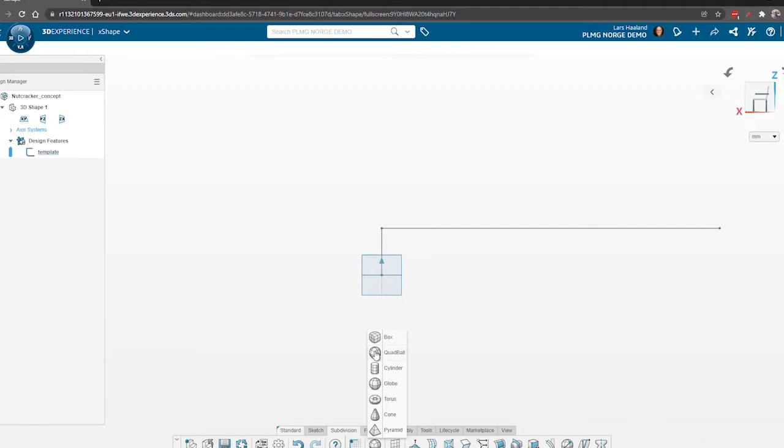So Lars, maybe you will tell us a little bit about the design process to start with. I can indeed. It's a regular tongue style nutcracker. And I had some fun doing this in the 3D Experience xShape app, which lets you basically stylize the shape from a primitive, and you can work from that all the way into a finished manufacturable model, actually. In this case, I used SOLIDWORKS to add the hinge part, but I could have stayed all the time with the model in 3D Experience.

Actually, I had some fun also using this 3D Experience platform to make this pattern, which lets you explore different pattern types quite easily. That's these teeth going in the center there. Exactly. Quite cool. And then we had some iterations back and forth to find out what was actually going to be printable of that pattern. So we landed on something that would hopefully do the trick with the nuts.

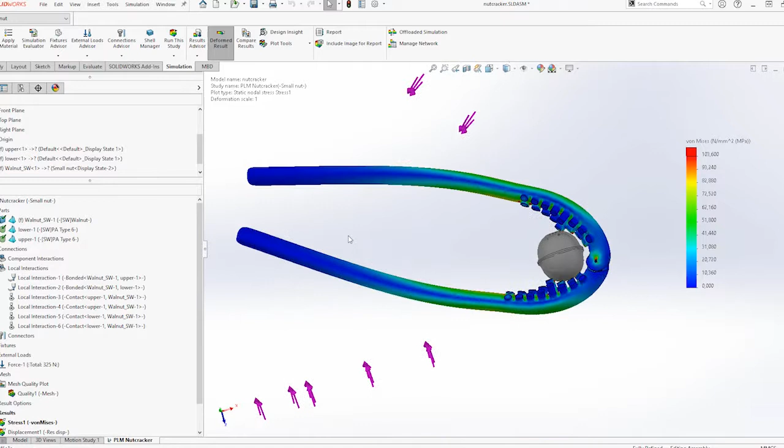Yeah. And due to the plan that it was FDM technology that was going to be used, we are a little locked down by the nozzle size. So there's a lower limit of what we can print. So you need to compromise, but I think it came out quite good. Design-wise, but simulation-wise, those teeth didn't do very well. It looks really good, Lars, but that is the weakest point. It will be exciting to see how they will handle when we start cracking these nuts.

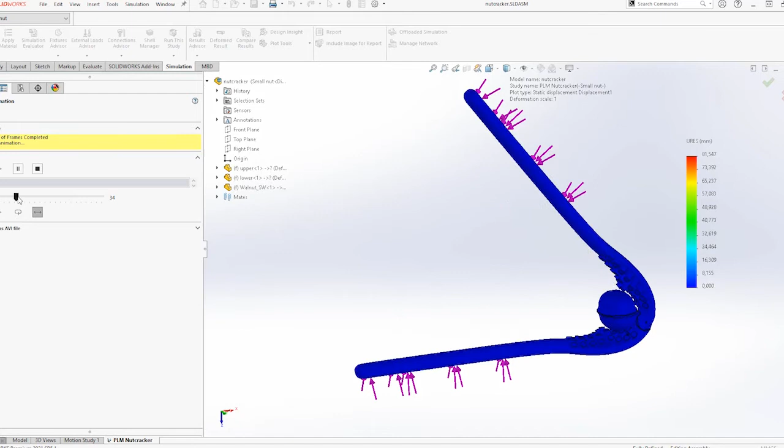Yeah, because we saw that there were some issues around some high stresses where these teeth came over into the handle. So both around all of the teeth, even where you had the handle bending too much, you ended up having stresses on the teeth. You did something to reinforce that, Stian, didn't you? Yeah, what I did was that

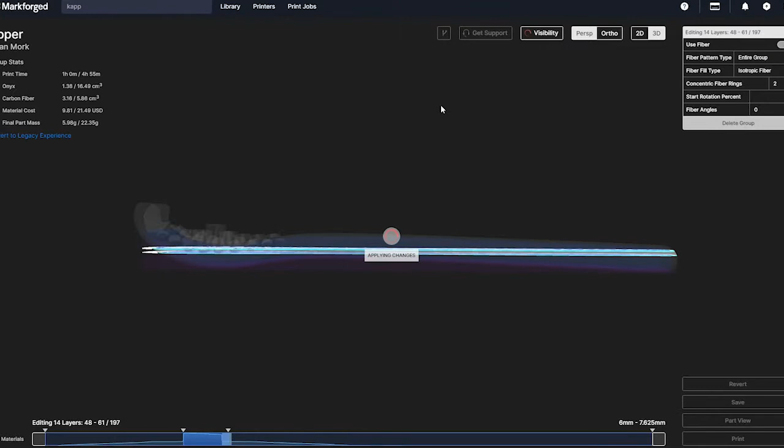I used a Markforged printer to print these parts, and Markforged are able to put reinforced fiber into the components. And if we put the fiber in the direction where the forces will go, we can actually come up to aluminum strength of the parts, which is quite nice for a plastic part. So due to the handles, I'm never afraid that this will not be able to withstand, because these are really rigid and they can take a lot of load.

But as you said, regarding the teeth, these areas are a little too small to be able to put fiber inside. And I tested this nutcracker a couple of times now, and you can actually see in the center that these teeth that had problems in the simulation have actually broken. So that shows that your simulations are correct, Erin, and you predicted this with SOLIDWORKS simulations. That's really good.

So you want to see the nutcracker in action? Yay! Please show us. So I will try to show it now. Put the nut inside it, and yeah, you see? All right. And the nutcracker is still alive and working. So that's really good. And the nuts are delicious.

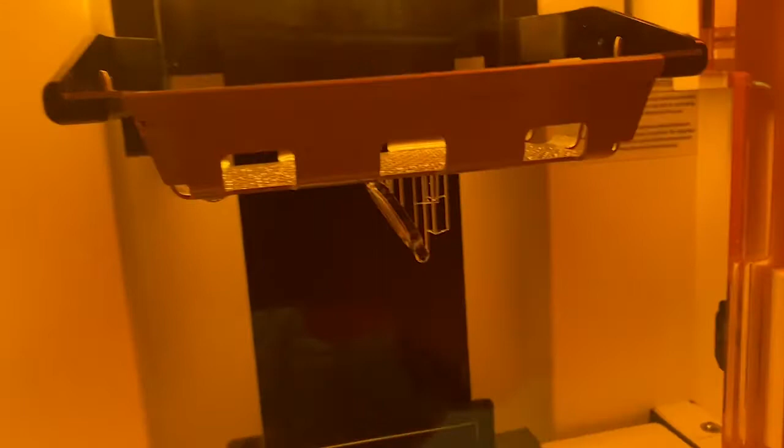I printed the main part on the Markforged with the carbon fiber inside it, but I also wanted to print a PLM Group logo, to show that we had designed and made this ourselves. So I used the Figure 4 DLP machine that we have from 3D Systems, which uses resin, a floating material, and a projector with UV light. When the UV light hits the resin, it will solidify, and you can get quite detailed parts out of it. This is an eggshell material used for eggshell molding, which has this cool transparent yellow color, and you can hopefully see the PLM Group logo inside it.

Another cool thing, I think this printer has almost 20 different materials to choose from. So you have rubber, you have plastic, you have transparent, you have everything, and it gives, as you can see, really high detailed parts. So it's a quite nice touch to it.

I actually have a question about the analysis and the physical product. Is it possible to break at all for a human being? Like if you have a stone or something inside the nutcracker? I haven't tried it. Do you want me to try something? I have this dog bone, which is quite rigid. I can, of course, try to see. I'm sure it's gonna break in the front. Probably around here, I think. Yeah. Correct.

That's great. And that was the second weaker point in the simulation. So for the next time, we need to reinforce this area as well. Yeah. The nuts are cracked. The Christmas can start.